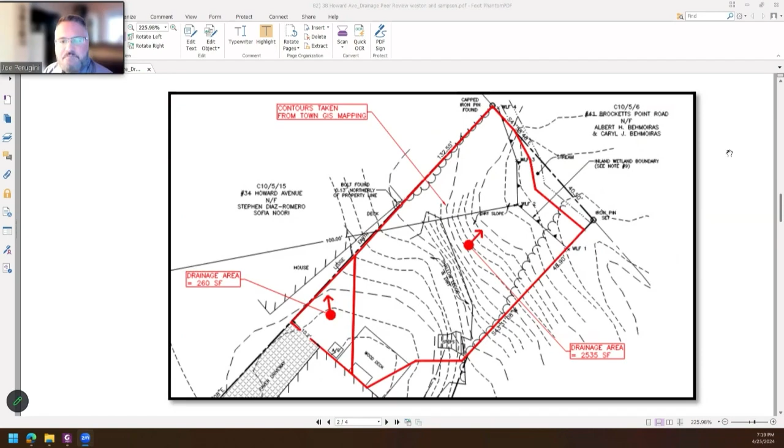Next figure, please. This is a zoom in of the current conditions after the patio was installed, with a survey done with spot elevations throughout. I added arrows to show the general direction based on the high points and where water's flowing. Most of the runoff flows to the upper right or northeast, and then there is some portion of that patio that flows north, or straight up. Based on the spot elevations given, I was able to interpolate and add some spot elevations between the spots that were shot.

There's about a 2% grade along the wall located along that property line. From being out there, there is an extension of the wall above the patio with a wall cap, which I was referring to as a wall curb. It prevents water from just flowing over the wall and into the property as it did under pre-development conditions. So this runoff, the portion of the arrows directed upwards, runs along the wall and then turns in a northeasterly direction.

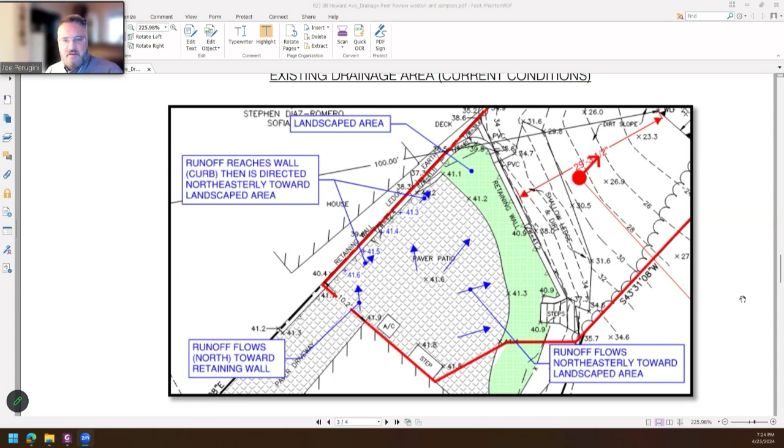So you have this thickness of topsoil. Below that, you have filter fabric, and then crushed stone in the portion behind the wall, and some processed stone, which is a stable base beyond the crushed stone. So you have this area of stone, crushed stone being the one with the highest voids.

That was important because the question is, where does the water go? If it's running off the pavers, it goes into the topsoil, which is in the planting bed. Considering what happens to the runoff, some saturates the topsoil, some can pass down through the filter fabric and into the crushed stone. There's a volume of storage that could happen in there.

That's important because it creates some detention. We look at how the peak flow of runoff is being reduced. So getting back to the original comment about increases in peak flow, to me that storage is going to be offsetting the increases. These are very small increases, but that storage of runoff, where is it going?

I don't believe it's running past the topsoil and over the wall. It would have to be an incredible amount of runoff to do so, but you also have the topsoil saturating. If there are plantings, that creates an uptake into vegetation, similar to a rain garden. You may have evaporation, but anything that overwhelms the topsoil saturation will probably just percolate down through the stone.

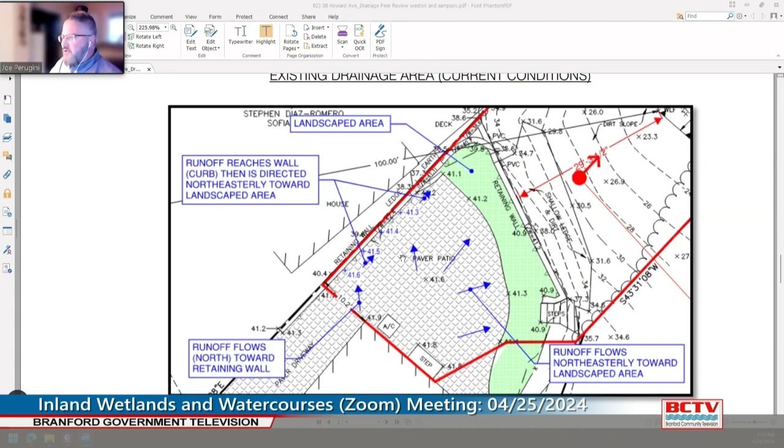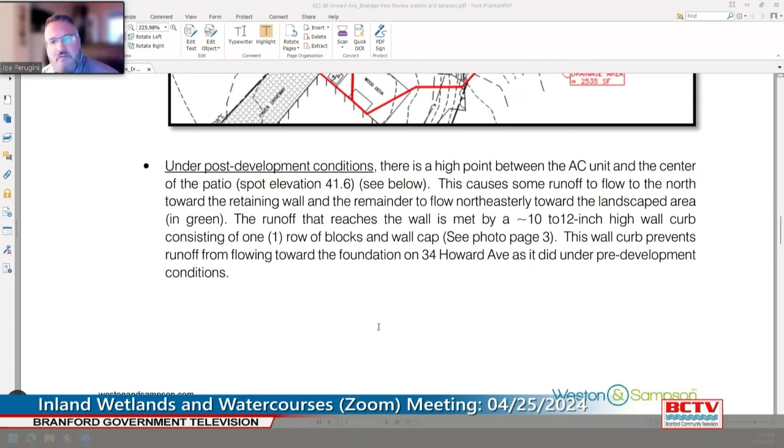If I can share, there's nothing to verify the actual width of the process aggregate or the sand or anything like that. No measurements were actually taken, physical measurements? Oh, I took measurements, yeah, they were included in my report. But I'm saying you don't have any photos of those measurements actually on site? A photo would help, since we weren't there to observe what you saw. Pictures tell a thousand words.

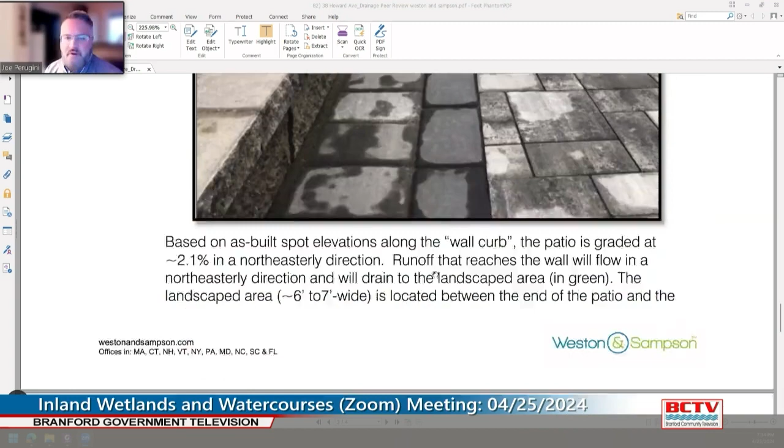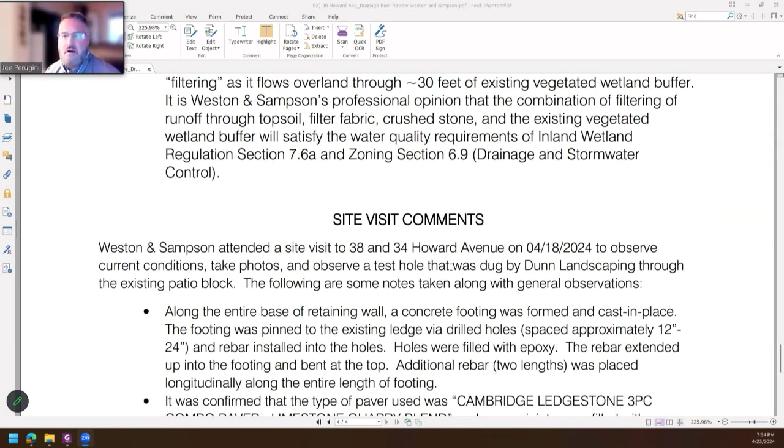Well, my report includes my measurements. There is a separate measurement that was done by the geotechnical engineer. You can compare those with mine. He took his information separately from mine, and I believe that was submitted for the record. But I don't have a measurement with a photo next to a tape measure, to your question. All right, thank you very much.

Mr. Chairman, with respect, this is Marjorie Shansky. With respect to the rain condition, Mr. Preddy has previously reported to the commission his observations during wet conditions, and Mr. Preddy is here if that's something the chair would like to revisit with him.

I would also like to echo that the letter from the geotechnical engineer has been provided to the commission. The geotechnical engineer has experience with soil and rock mechanics, foundation engineering, earthwork, and site work. He includes his measurements from the site observation and his conclusions, consistent with what Mr. Preddy and Mr. Perugini have said: there is no technical merit in a claim that the perimeter wall and patio account for any increase in flow or damage to the adjacent property, which is not a direct wetland issue.

The drainage issue associated with the wetland is: where is the water going? Mr. Preddy has answered that previously, and it's described in his drainage report. We brought in Mr. Perugini to evaluate and review those conclusions and arrive at his own conclusion, which is consistent with Mr. Preddy's. If you have additional questions for him, this is as good a time as any.

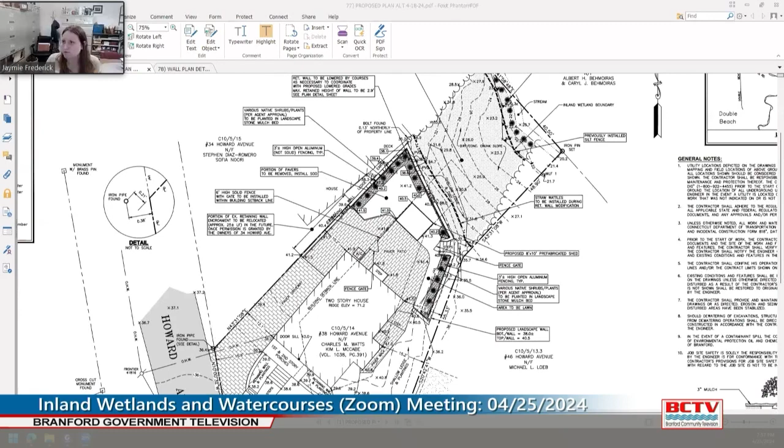Jaymie Frederick, the wetland agent - is everyone seeing a site plan? Yes. Okay, so here's the revised site plan. They did update the call-out portion of the existing retaining wall encroachment, to be relocated approximately 25 plus or minus linear feet in the future once permission is granted by the owners of 34 Howard Ave. The retaining wall is to be lowered by courses as necessary to coordinate with the proposed lower grades. Max retaining wall height is to be 2.5 feet.

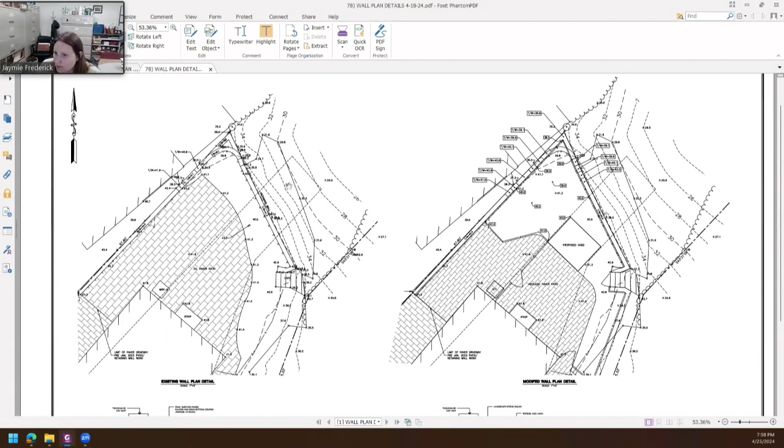And if you guys want more details, then I would suggest that you ask that of the applicant. We've got the existing conditions of the retaining wall and the proposed conditions of the retaining wall, and you can see the different courses and top of wall heights, with spot elevations near the base of the wall.

This is Commissioner Boda. It seems like if there was a revision submitted on Friday, perhaps Mr. Preddy could quickly review those changes that were made.

I can. Jim Preddy, Criscuolo Engineering. So one of the questions was, how was the wall going to be lowered? Well, we provided an outline of the sequence, and then I actually took the time to look at the elevations of the different courses, and figured out how to step the block to coordinate with the wall - the grades that we need behind the wall to meet the zoning requirements.

And that's what you see - that's what this enlarged plan shows. The one to the left was what exists now, and this is how we're proposing to lower that. It shows the steps of how it will be lowered, because that was a question that was raised before.

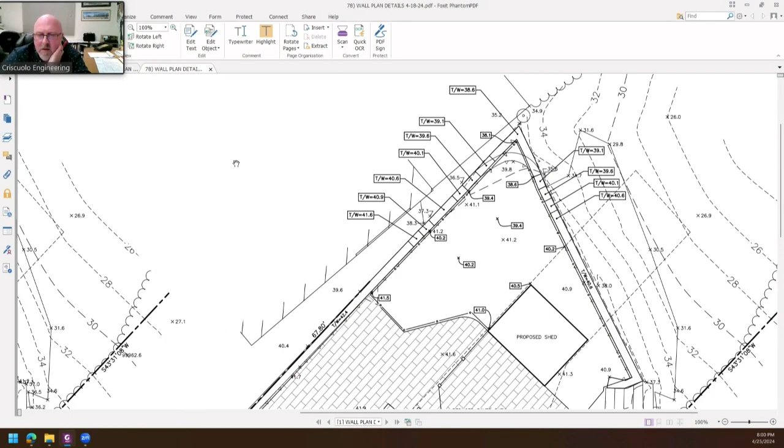If you scroll down, I also revised the detail that we had shown before, which was a generic detail from the block manufacturer showing typical installation. I modified the detail to more closely mimic the construction as I understand it from Roy Dunn, showing the concrete backup, the stone behind the wall, the geogrid reinforcement, and showing this being pinned and leveled to the ledge.

We also added a strip of landscape stone mulch behind the cap of the wall to ensure that even in frozen conditions of the lawn, the water would have a way to get into the stone section behind the wall.

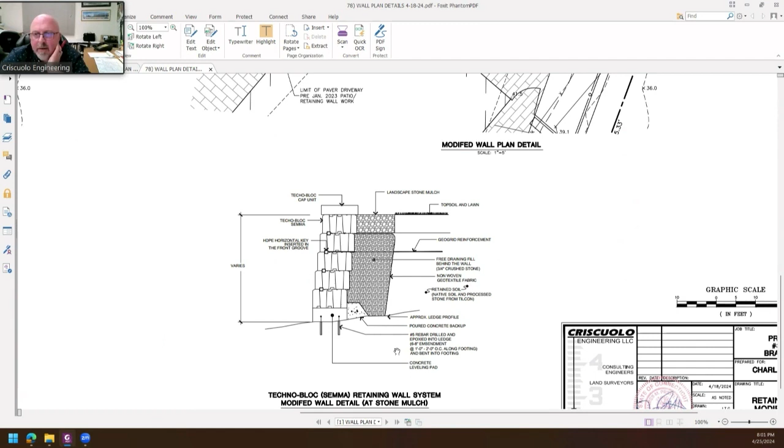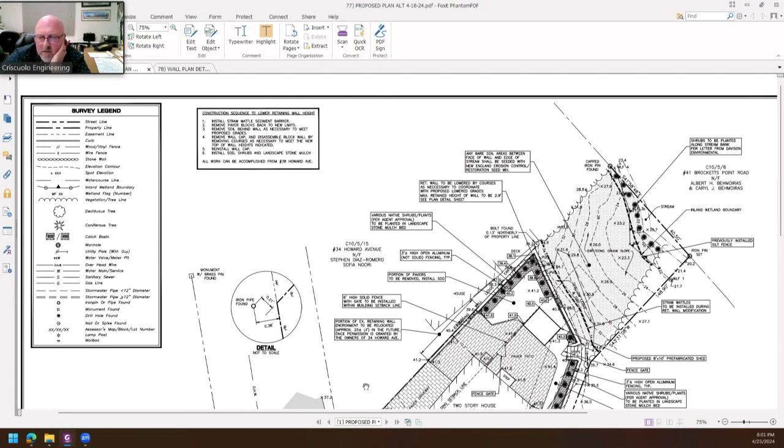As far as other adds, the other thing is if you could go back to the other plan, Jaymie. If you notice on the driveway side, I changed the pattern type so you can clearly see where the driveway ended prior to all this happening, and where the new paver started. There seemed to be some confusion on whether this whole thing was built recently or not, and that paver driveway existed, even before January of last year when the patio was built, up into the line where the retaining wall starts. So I changed the pattern there to clarify.

I think that was all as far as plan changes.

This is Commissioner Begman. A question about where the cars stop, there's no retaining wall that's level basically with the ground? Well, it slopes toward the road, but yes. This is where they stop now, is where that line is.

Commissioner Begman, just a question. I know this isn't zoning, but what would prevent a car from driving too far onto the patio? Well, we are installing a fence at the end of the pavers. The limit of paving is actually pulled back from what's there now, so we pulled back the paving considerably and added a fence along that edge of the pavement, so they could only go a few feet past the house after this gets revised.

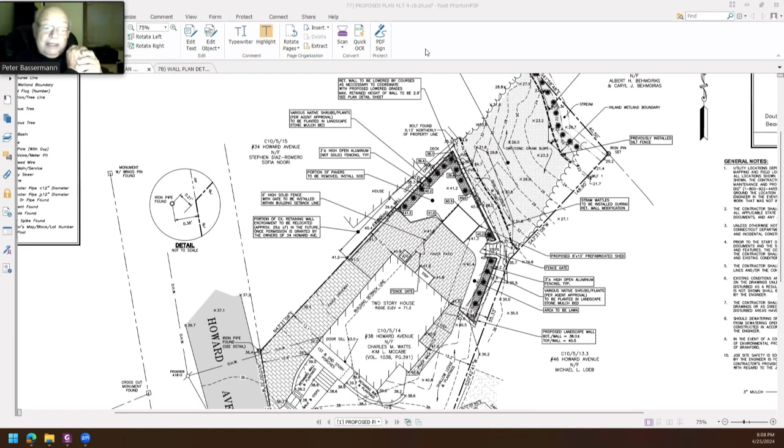This is Commissioner Bassermann. I think that with the presentation of the new material, addressing the questions raised at the last meeting with the public hearing, it would appear that those questions have been addressed. Commissioners have had a chance to review that material, and not hearing any further questions for Mr. Preddy, I would assume at this point that the record on this amendment is complete.

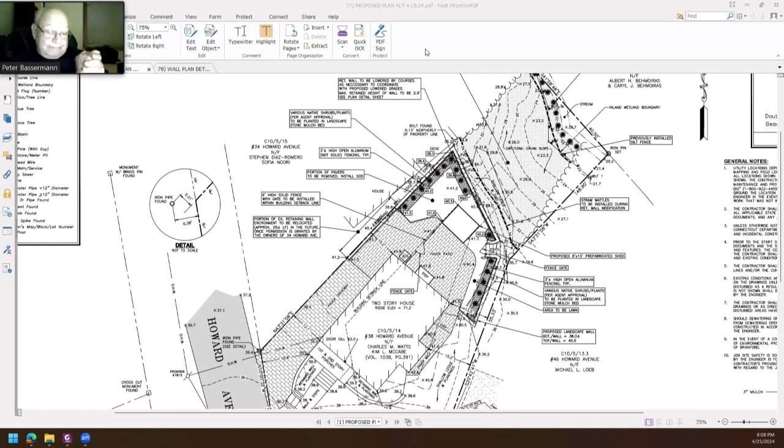This is Commissioner Bassermann. Attorney Shansky, does that conclude the presentation this evening, and are we ready to move on? We're ready to move on, subject to later rebuttal, but thank you. Okay, we now open it up to the registered interveners for their presentation this evening.

Thank you, Commissioner Bassermann. Keith Ainsworth, representing the interveners. So I have with me this evening Mr. Ascatino, who you saw before. He is a structural engineer. Mr. Rob Sonicson, who is a professional engineer, and Rob Russo, who is a soil scientist, as well as Sofia Noori, who is representing my clients as the intervener.

I'd like to start off by just making a few comments of my own, and I'll try to be as brief as possible. I do respect what you're trying to do in expediting the matter.

So I noticed that the new plans are yet another set of plans, and that the comments about the drainage done by the peer reviewer were showing a pre-existing drainage pattern based on the current pattern of pavers, and then make some assumptions about drainage going into the subsurface. But when you remove more pavers, you're going to have more infiltration, just as Mr. Preddy just said, more opportunity for water absorption, which means more water getting down beneath and going toward fissures in the rock, which is a transmission pathway to my client's basement.

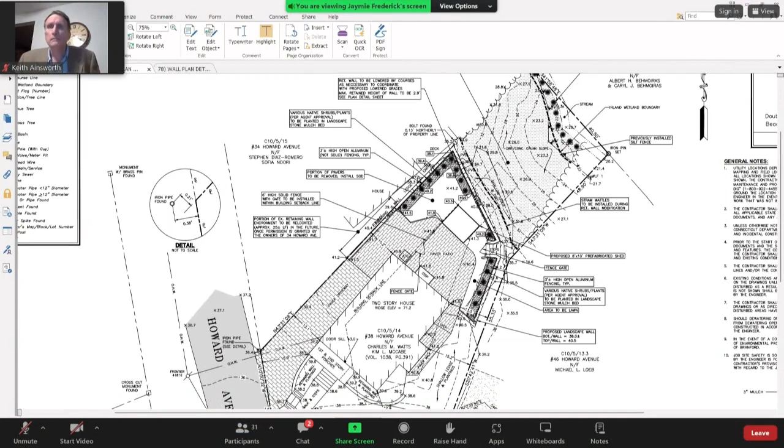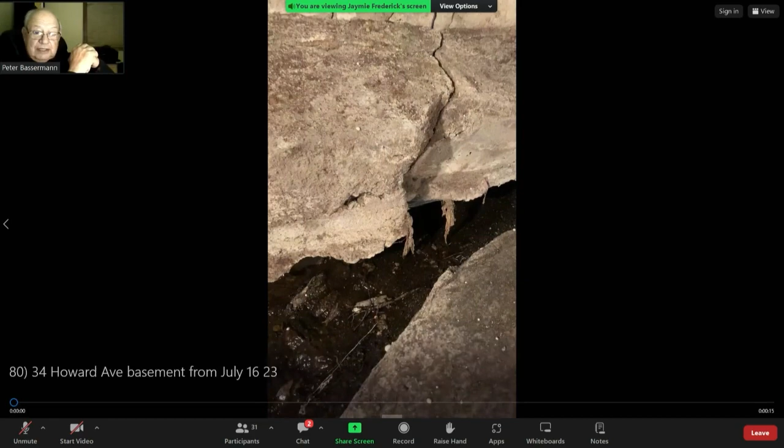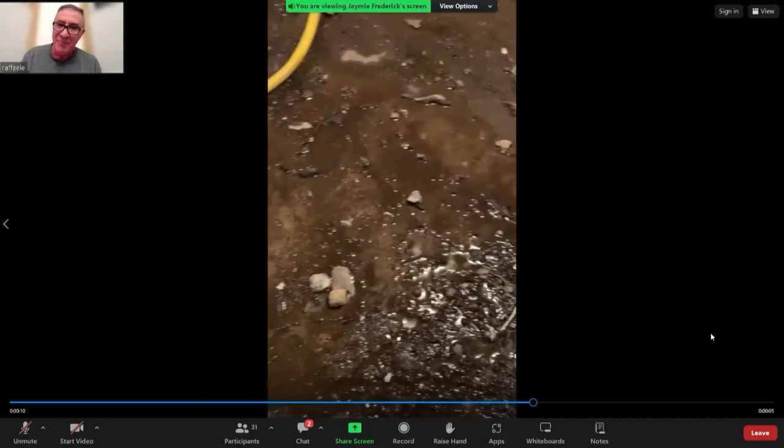Is everyone seeing the video, or what looks like a video clip? I see a picture, I don't see a video designation. Now you're seeing it? There we go. Now, that should be your weep holes. Your weep holes are into the basement of 34.

Commissioner Bassermann asked, on a site map, can you indicate where the location of that video took place? Yeah, I could give you an approximate location if we look at a map. Jaymie, can you help me here? I'm looking for the survey of 34 Howard. Mr. Chairman, who took the video? Perhaps they are the best person to talk about what they were looking at. I saw the location in the basement, so I have an approximate location. I'm pretty confident I know where that is.

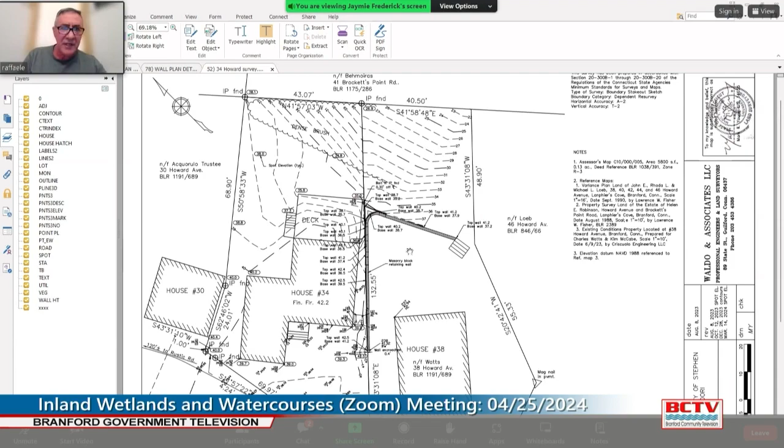Can we point that out on the map I'm viewing now? Okay, I think we want to scroll that up. That's the original condition. Let's see, I would say roughly where it says masonry block retaining wall, where that arrow is pointing to, next to the 55, roughly approximately that location, or slightly closer to the corner, give or take 4 or 5 feet at approximately that area.

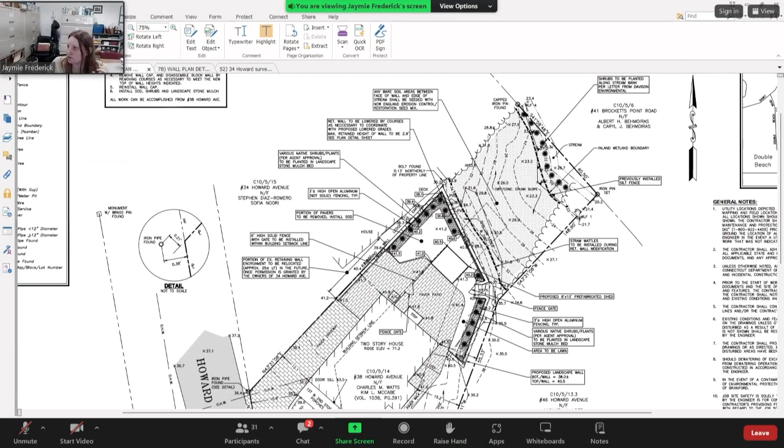Okay, anything else, sir? Unless you have any other questions, if I have any questions, otherwise I'm done. Any other questions from the commission? Okay, Attorney Ainsworth, who's next? Thank you, sir. Mr. Sonnichsen, you're up.

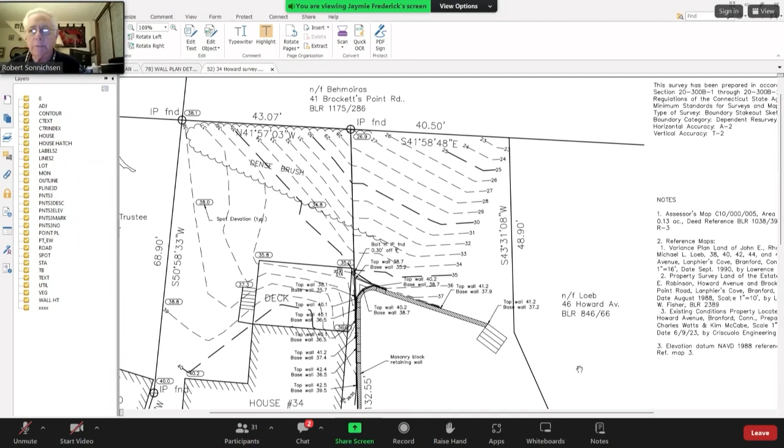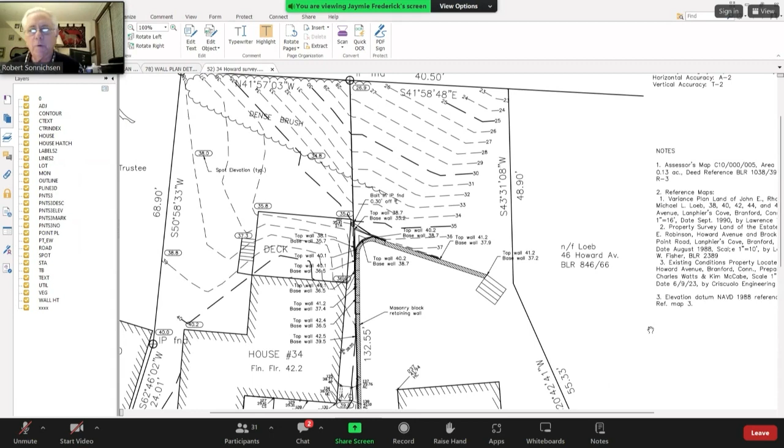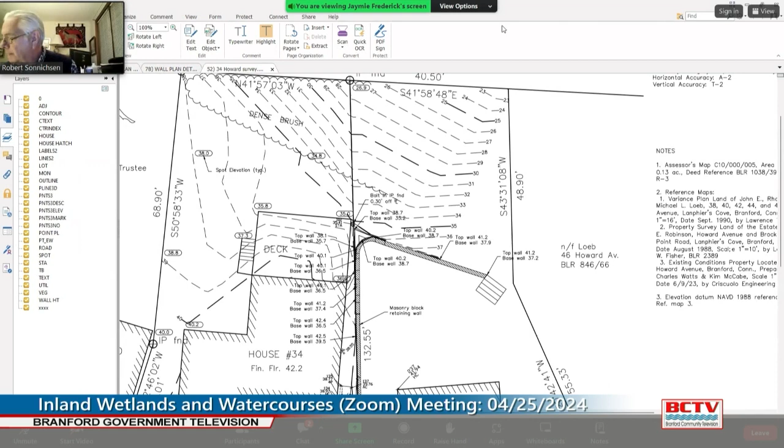I'm going to talk about the changes made in the 4/18/24 plans. The drawings have been changing since September 25th, 2023, and the proposed application has morphed and changed over all of these hearings. For example, the drawings from 9/25/23 to 2/14/24 indicated clearly, and this is critically important as far as I'm concerned, that there would be a 4-inch PVC pipe with gravity flow to an outlet in the rear, immediately behind the wall.

The 4/18 plans have now changed and show no controlled drainage behind the wall. It's all just stone. The reason you put the PVC pipe in is because the water drains directly down from the stone and seeks the perforated PVC pipe, and you direct it to where you want it to go. In this case, without a PVC pipe, the water goes down, hits the bedrock, and flows through crevices as it may and makes its way out.

One of the things that is critically important is that storm drainage be controlled in this kind of installation. Without that drainage pipe behind the wall, and the way they talk about drainage pipe at the bottom of the wall, those pipes do not run parallel. They don't pick up the water from the entire length of the wall, only a small amount that may drain to the far corner. That's not consistent with the standard drainage design for these kinds of block walls.

Excuse me, Commissioner Papantonis: Mr. Sonnichsen, could you say that again? I'm trying to understand what you're saying. Okay.

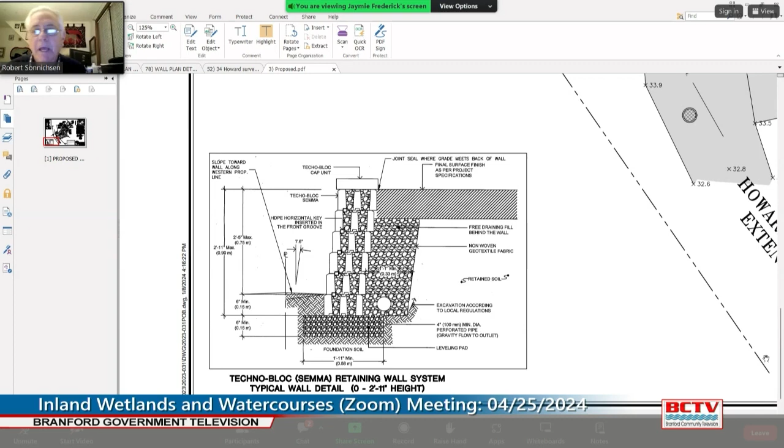If you go back to any of the drawings previously before the commission, they're cross-section drawings of the proposed conditions after the wall had been modified. All of those drawings show a 4-inch PVC drainage pipe behind the wall. Here's an example, you can see it clearly on this detail. Every single drawing that has come before you until tonight shows that 4-inch diameter perforated pipe with gravity flow to outlet. That has been removed from the proposed drawings.

From a technical perspective, there are serious problems under the existing conditions. There's flooding in the basement next door. Now you're not going to put in a drainage pipe, which would in fact collect any water that leaks from behind the wall and discharge it to the far end of the wall, and you're allowing it to drain into the rock and across into the basement.

Attorney Ainger mentioned that all the previous plans showed multiple geogrid layers. The current cross-section in the 4/18/24 plan shows only one geogrid layer. I think that might have been an oversight, because there are in fact two that were constructed, but that's something I just wanted to point out.

There's another interesting thing on this drawing. If you look at the top, at the back of the capstone, there's a note that says joint seal where grade meets back of wall. That's an extremely important component in a wall like this, because when water flows across pavement and hits a joint with another material, the water seeks to go down the face of that material. These details anticipated that. It obviously wasn't included in the original construction, because there's a lot of water leaking through the face of the existing wall. This note would have addressed that to some degree, but it's been removed from the current cross-section plan.

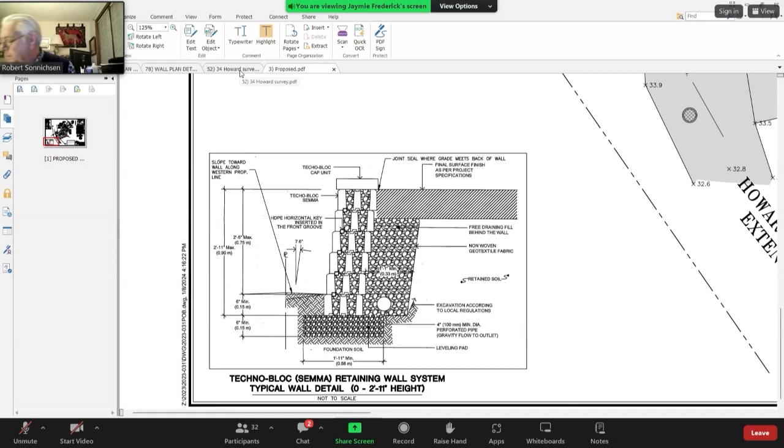I know there's a note on the plan that says the wall is going to be 2.9 feet, no higher. But my measurements show that on the plan before you, the top of the wall to the bottom of the wall differentials range from 2.6 feet, which is good, that's less than 3 feet, to 3.6 feet, which is 0.6 of a foot higher than the 3 feet. So they would have to go back and get a zoning permit from the zoning commission, and the section of the wall that's over 3 feet would have to be offset from the property line, along the setback line, by the height of the proposed wall.

Just a minor note, but I looked at the plans. There was a call-out way over on the far eastern side of the prior plans that said '3-foot aluminum fence, typical.' What caught my attention was that the new plans that just came in actually call it out right on the top of the wall, right adjacent to Howard Avenue. It had never been shown with that specificity as going along the entire length. It just says it's typical, and doesn't really show if it stops someplace and continues. You have to assume it's going to be along the entire top of the wall.

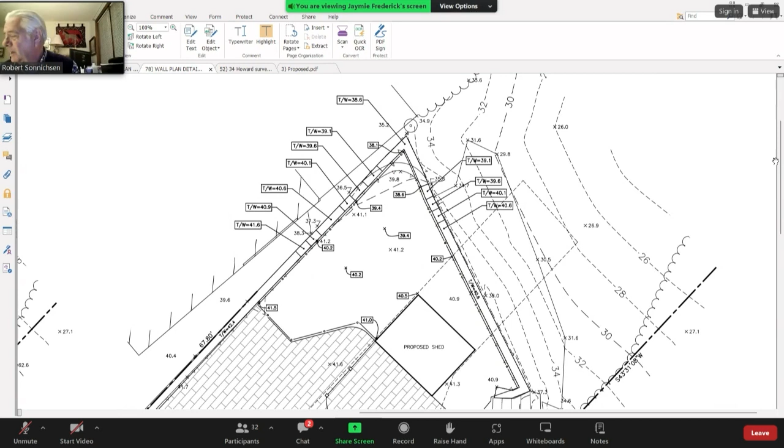Those were my comments on the revised plans. We really didn't have a lot of time, but I'm glad I had a chance to review them. There were a lot of changes that happened very abruptly in a very short period of time. It wasn't just small changes. Particularly the drainage one was very alarming to me. So thank you for your attention, and I can answer any questions you may have, or I'll turn it back over.

Commissioner Bassman: I'll turn it over to the commission for questions for Mr. Sonnichsen.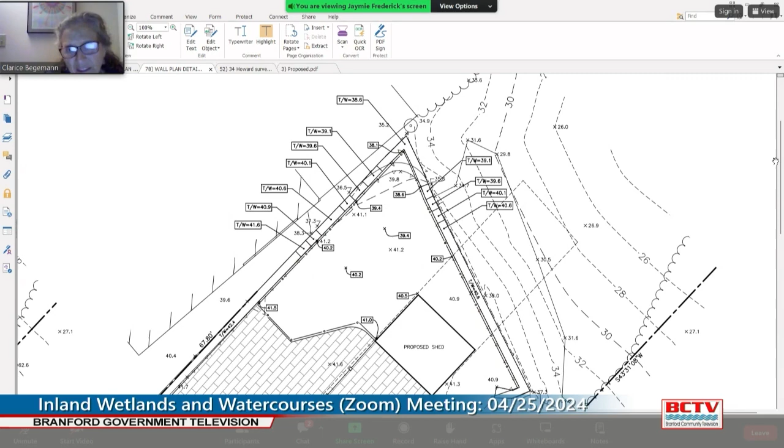Commissioner Begemann: Can somebody point out where Mr. Sonnichsen sees the 3.6 foot versus the 2.6? There's a 40.1 on the top of the wall. Right, here or over here? Actually, I think the 3.6 might be 40.1 to 36.5. Wait a minute. Yeah, 41 to 36.5, the bottom of the wall. This is right adjacent to the deck behind 34 Howard Avenue. So we have a top of wall, and the spot where it transitions, my measurement there showed it was 3.6 feet.

Commissioner Bassermann: When you say your measurement, are you comparing plans, or was there an actual empirical measurement? No, I measured the difference between what's shown as the top of the wall and the spot grade at the bottom of the wall, and subtracted it, and it came out 3.6. But I'm saying, were you actually on site when you did that, or did you do it by the plans? No, I used this plan. This is the only plan that shows what the new top of walls are going to be. It just came out on Friday. Okay, thank you.

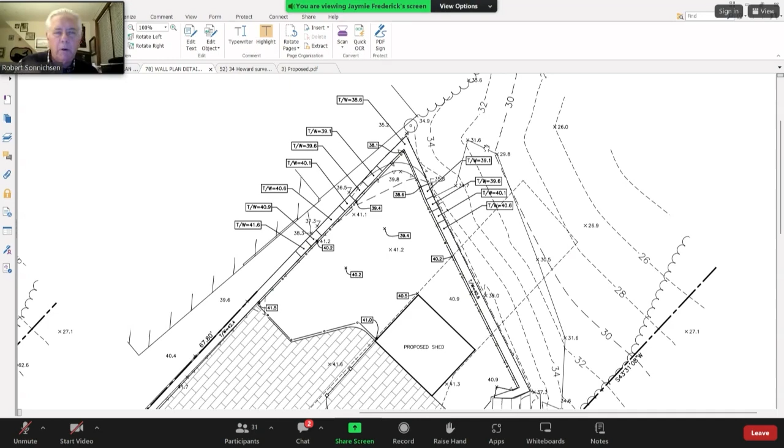This section only has... well, the mulch has changed. This is a side note, I'm digressing here for a second, but I am a little bit concerned about it. It used to show mulch there on top, but now it shows landscape stone mulch, but there's supposed to be plants planted in it.

I don't really know how the plants are going to flourish if they're planted in stone. That's kind of up for a landscaper to figure out. But what's going to happen is that's highly permeable material. Any water that flows along the wall or sheet flows down across the patio will run into this landscape stone mulch buffer and drain directly down through the mulch into the crushed stone, and it will continue going directly down.

Until it hits the ledge profile. You can see the approximate ledge profile at the bottom. From that point, it's going to find its way by gravity to wherever it wants to go. What's happening now, based on our observation, is that some of that water is making its way through voids in the rock and off toward Howard Avenue, and that's caused an increase in leakage in their basement.

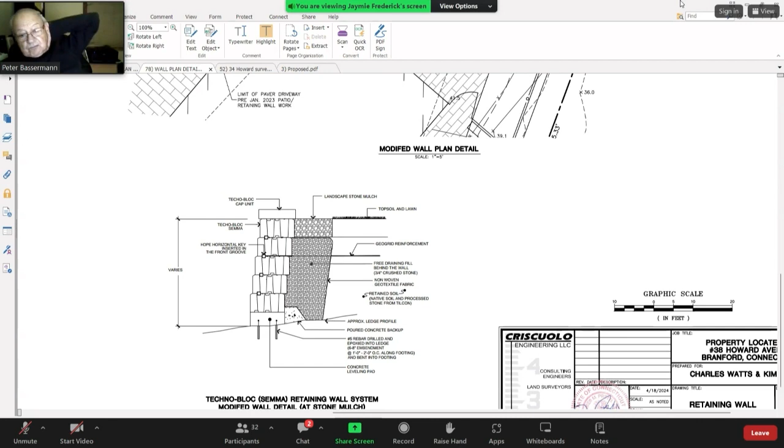Do we have one more presenter this evening, Jaymie Frederick and the agent? Before we move on, I do think it was a good point raised about the stone mulch and the growing medium for the proposed shrubs, and have the applicant speak to that.

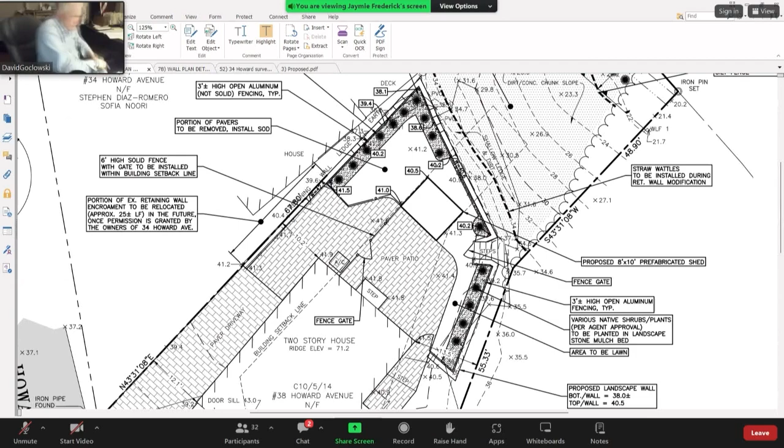There is a proposed straw wattle to be installed down slope of the construction. In this case, you see those straw wattles going over an area that's called shallow ledge and dirt. Straw wattles need to be staked into the ground, and I would say alternative means of erosion and sedimentation control should be specified there, because I doubt that stakes can be driven into that ledge that are going to hold straw wattles in place and keep them functional.

I would also note that only very recently did the results of the test pit that was done in the patio become available. I really haven't had time to review those with regard to the construction of the patio as it exists now and the modifications that are proposed, to see if it's consistent with the hydrology they're describing, and if there's further potential for impact based on what the results of that test pit are. It's just information that arrived at the last minute that I haven't really had a chance to assess.

Just recently, with the new information, I believe the applicant's team has clarified that the pavers are almost all impervious. Earlier in presentations, the applicant's engineer said no, they're somewhat pervious, but the reviewing consultants have said no, they're really impervious.

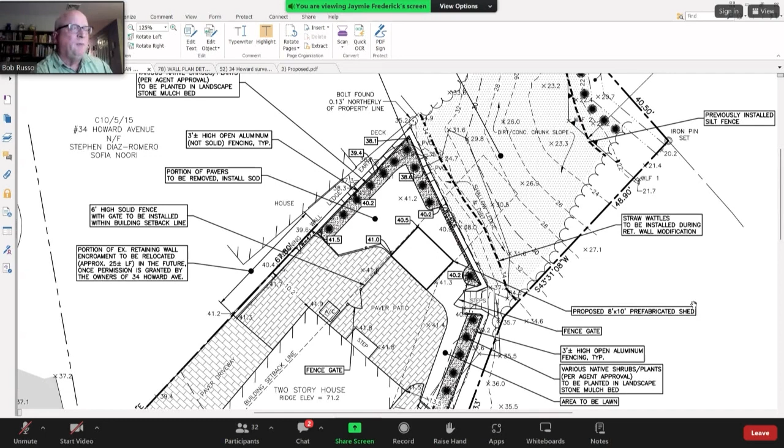I hope that that's now clarified, and would like to get a chance, although I know the public hearing will need to be closed, to relook at this based on an understanding of how they've described the pavers themselves that are being used.

I'll wrap up quickly. I feel like this is very much at the same place it was at the last meeting, and that is they went ahead and built this. There wasn't an application before the commission. The commission didn't have a chance to walk the site or to hire experts if they so desired. Now the commission and the consultants for the neighbors are operating with a dearth of information on this project. I'd be happy to answer any questions. Thank you.

Commissioner Bassermann, this is the opportunity to address Mr. Russo with any questions you have. If not, I'm going to ask Attorney Ainsworth whether that concludes the presentation from the interveners this evening.

Keith Ainsworth here for the interveners. I would just like to give Sofia Noori an opportunity to address the commission briefly.

This is Commissioner Begemann. Before we do that, can I ask Mr. Russo a question? In terms of not being able to see the test pits, or to have time to have thought about the materials that are now thought to be behind the walls, can you tell us how it would affect the wetlands depending on what was there?

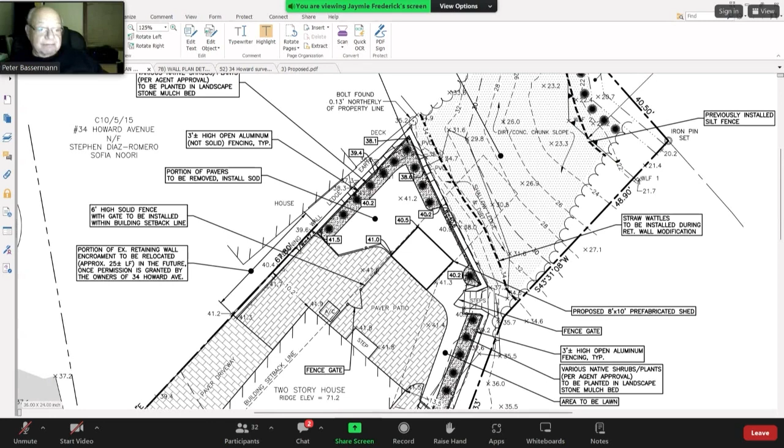The commission notes they would also include that as an exhibit if it's going to be shared this evening. After a brief pause to set up screen sharing, Sofia confirms people can see the shared screen.

Yes, so this is the size of the test pit - it was 2 pavers by 2 pavers. I'm not even sure if it was 2 feet by 2 feet given the size of it. No one was able to see what was in it or what occurred out of it. We've gotten descriptions, but I think it's a little funny that Jaymie wasn't invited to look at it, and there are no other pictures of what it actually looked like inside.

It's also really confusing what's occurring with the drainage, because some people are saying it's impervious, some are saying it's pervious. Then some said there's polymerized sand so nothing can get through it, but then they're saying it retains water. Their structural engineer and our structural engineer both shared that there's no mortar between the blocks - it's an interlocking block retaining wall that's supposed to just drain freely. So it's super confusing to me how exactly this is draining.

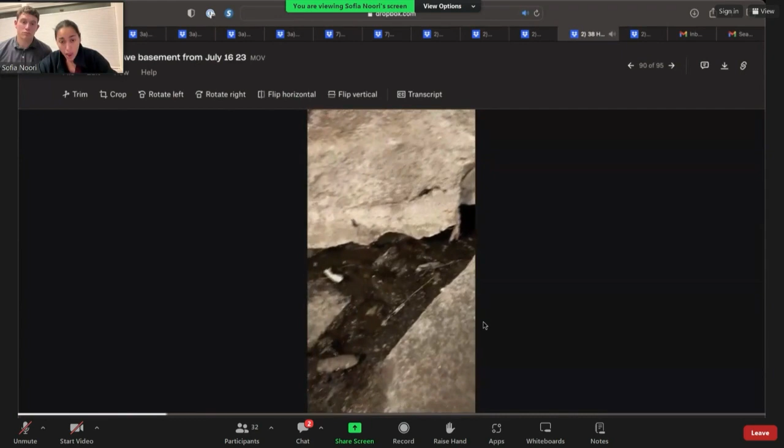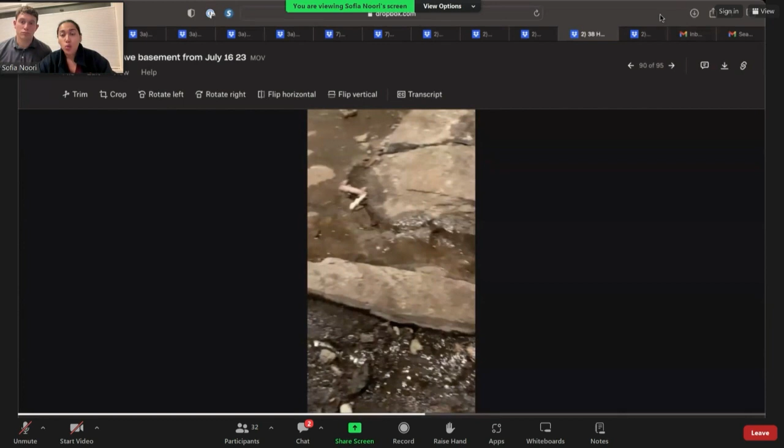What's also concerning to me - and maybe I'm starting to understand a little bit - is that parts of the wall don't seem to weep, and then this is literally happening in our basement. They're saying the water flows down towards the wetland, showing a red arrow indicating the water just goes down towards the wetland, but I'm not sure if that's correct, because there is weeping in the wall.

We do see it, and it's coming onto our property. I'm not sure why, but it does actually drain onto our property. To show you this, it's weeping between the blocks onto our property, and then this water presumably also goes to the wetlands - I'm not sure.

So I just don't understand how it drains. And I'm not sure if we'll ever understand it, because none of us have seen what the inside of the wall looks like. We've been through 11 months of this and people still can't agree on if it's pervious or impervious.

Another piece is, when we were asked as interveners to submit any other questions, we submitted as many as we could to get answers. Attorney Shansky and Jim Preddy provided responses. One question was that in Dunn's photo roll, it's clear there are extra pictures of how it was constructed. They said there's no further pictures, but you can clearly tell there's more. They're just not being provided to us.

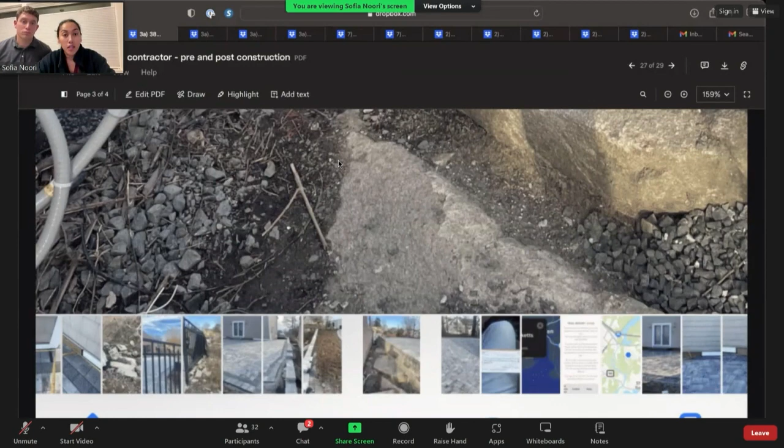So it just makes me feel like we don't have all of the data that they have, and they're providing selective amounts of data that support their thesis.

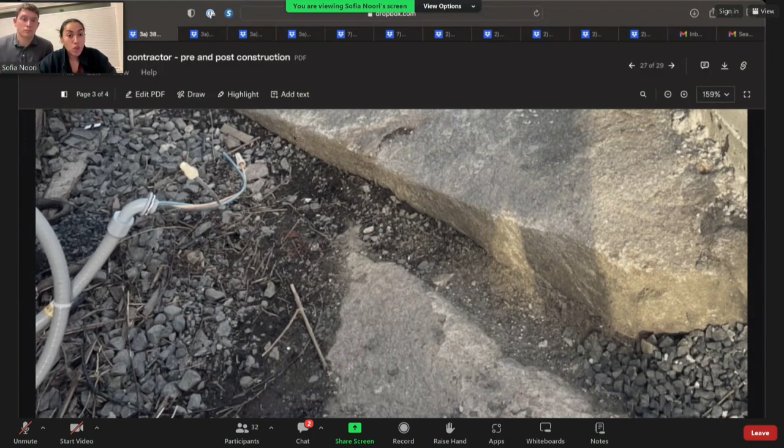Also, I'm still confused about how much geogrid this retaining wall is supposed to have. I understand the geogrid is supposed to provide some structural integrity to the wall, but they said there was 2 layers, while in their cross section of the wall that Mr. Preddy completed, there's only 1. So in the proposed plan, I guess I'm confused about how much geogrid is supposed to be in it. Is it providing some structural integrity?

Because they did just say that they are planning to drive cars on it. So is there supposed to be 1, 2, or 3 layers? I feel like I have no idea about that, and I feel like it's kind of important to know.

And then the other piece is going back to the heights of the wall. Let me see if I can find their detail of the actual updated wall. Let's see. Okay, it's item 78, I'm just bringing it up. I can screen share it. I've got it open. Jaymie, I found it.

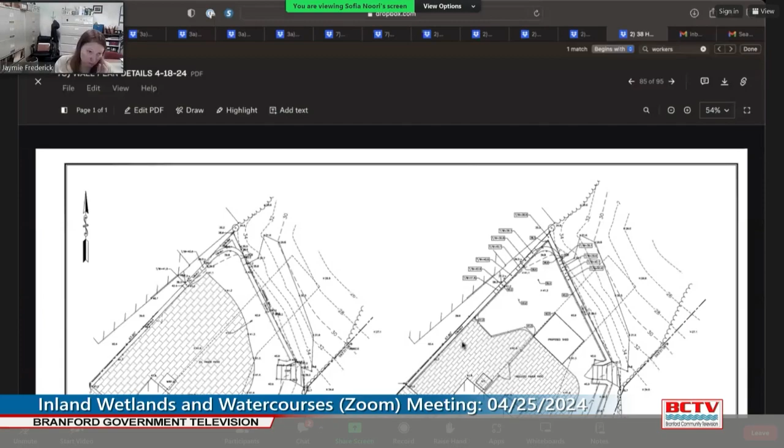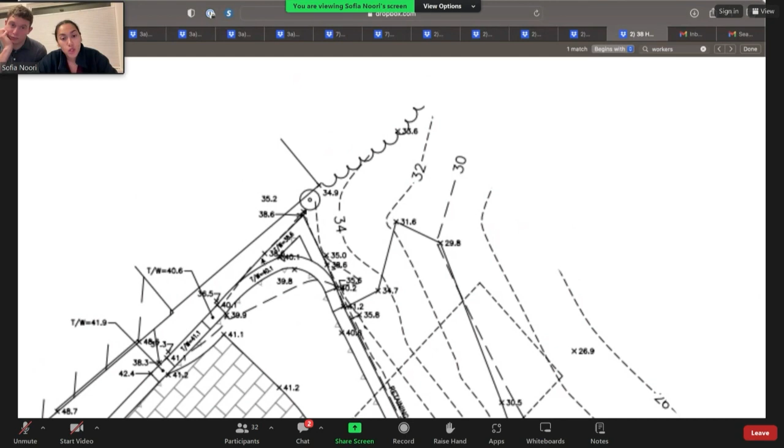So in this, they're saying the wall is going to be reduced to 2.9 feet, right? It's clear that there are certain points on our side of the wall that actually really aren't lowered, which is what Rob was saying. But also here, this top of wall is 40.1, and then the elevation here is 35.2. So it seems like, I don't understand if these are supposed to be two different walls, but functionally, if it's a 5-foot wall, we know Dunn is constructing a 5 to 6 foot wall.

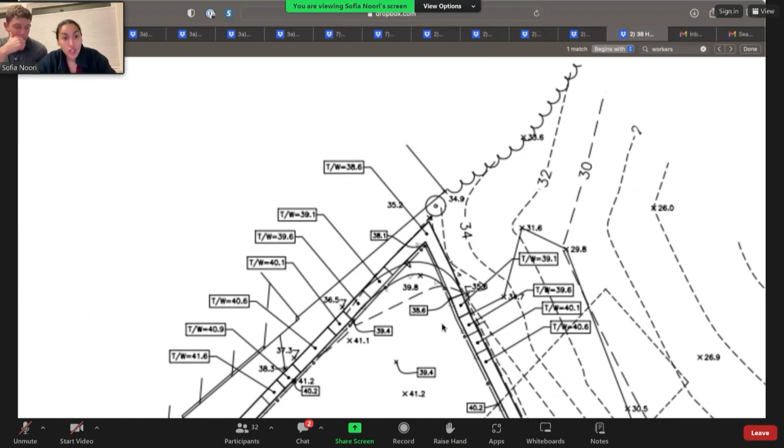At 22 Howard Avenue, who have applied for permits, which is good and decent, they have 3 layers of geogrid. So just because there's this little curvature, does that mean that if it's 5 feet tall collectively, it doesn't need more geogrid than that? That's a question I have, and it's inconsistent because, again, Jim Preddy said there were 2 layers that he saw, but the detail in here shows just 1.

The other piece I'm really confused by is the driving on it, because initially they didn't necessarily share that they were going to drive on it. Now they're saying it goes up to here. But what happens if someone just keeps on driving? Do they just fall into the wetlands? What is supposed to keep them from driving over the soil here into the wetland, or onto our side?

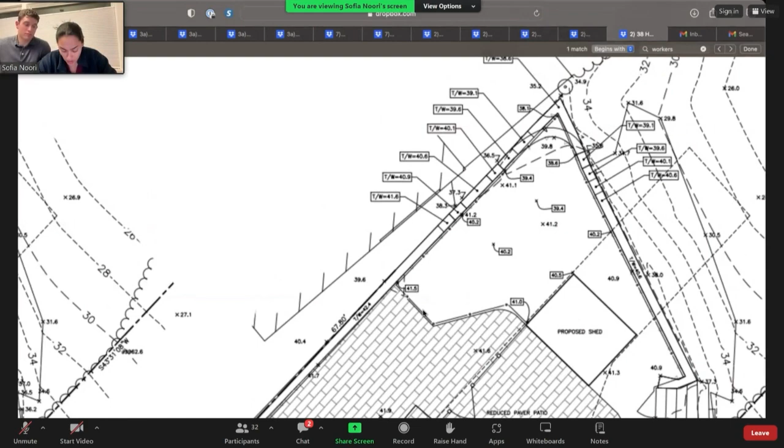And then again, I'm just not sure, like, that the water, I'm not convinced we understand enough about the drainage to be able to say that the water straight up isn't going into our basement.

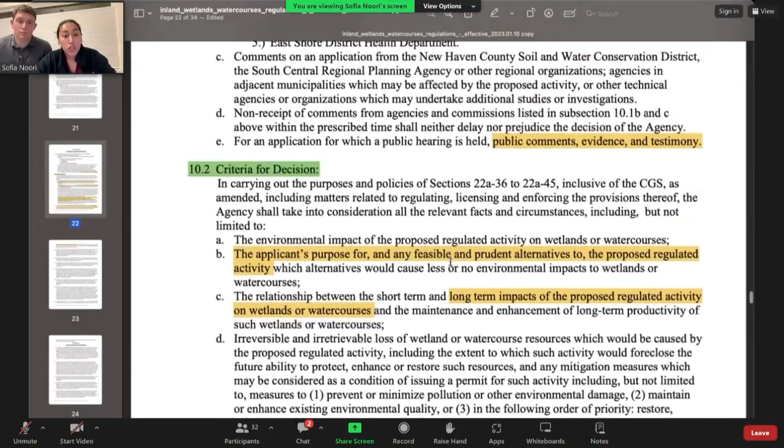And looking at the regulations, if we go back to this, just really trying to stick to what we're supposed to be thinking about for the criteria for a decision. We're supposed to think about the purpose for and any feasible and prudent alternatives to the proposed regulated activity. But Commissioner Glowkowski asked like 5 times to the applicants, why did they build this?

And nobody's told us what it's for or what the purpose was. So how do we know if any feasible and prudent alternatives actually existed? They decided what they wanted to do and then did it. And for all we know, they could have just needed a bigger deck. We don't know if this needed to be built for it. And so now what they're saying is that there's no alternatives because they already built it, and the best thing that we can do is just let them keep it.

The other piece too is, I understand that they said there's no impacts currently that have been observed to the wetlands. I'm still not convinced that they actually proved there's no long-term impacts if we don't understand how the drainage works and where it's going. So that part, I'm not totally sure about either. And then looking back at these things, potential impacts to properties do matter, like the character and degree of injury to the reasonable use of property which is caused or threatened.

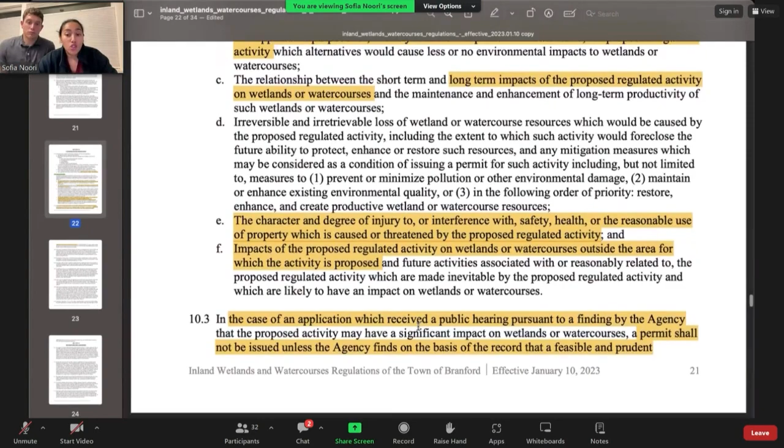So the threat of it is also a factor for consideration, and unfortunately we're the owners of the threatened property. And then again, when it comes to the impacts of the proposed regulated activity on wetlands or watercourses, we're also in an upland review area. And I'm just not sure if they've actually met this, which makes it really hard for us to support the application.

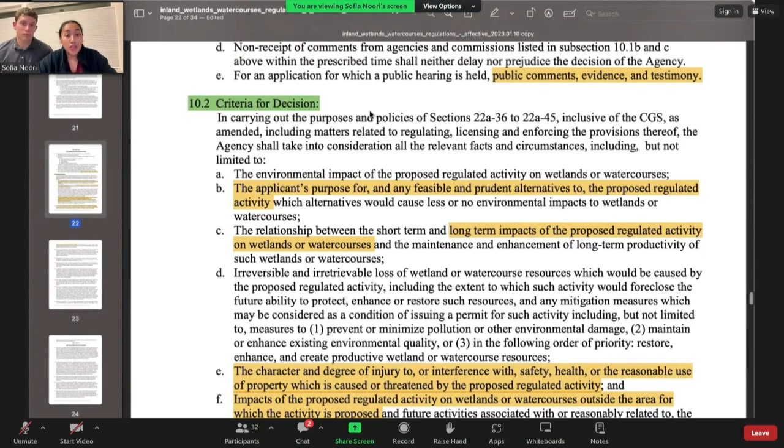The other piece as well is, just stepping back from the actual factors for decision making, I think the tough part is the ethics piece, right? I was reading about why the Wetlands Commission and wetlands regulations were even founded, in the preamble to the regulations. A lot of it talks about protecting citizens, and that this is something we should do, protecting the wetlands. It's about the ethics of it, trying to do something honorable for the environment.

And I'm just worried that this also sets a precedent that if you have means in this town and wealth, you can do what you'd like and then throw money at the problem after, hire 3 lawyers and get a permit. And I'm not sure that's the precedent we want to set, that you can just keep pushing at it, do 11 months of meetings, and eventually somebody will give you something.

I also just think that this is ill-gotten in some ways. And I understand they're trying to make things right, but honestly it comes off as performing responsibility instead of taking responsibility when there are so many inconsistencies to what they're saying. So it makes it really tough for us to actually support what's happening here. And I don't know if another meeting is going to give us more information. Every meeting there's so many questions, and I'm not sure we're getting any closer.

So we give our consent to the removal of the wall, and for them to just restore it and build it correctly so that we know it's actually in.

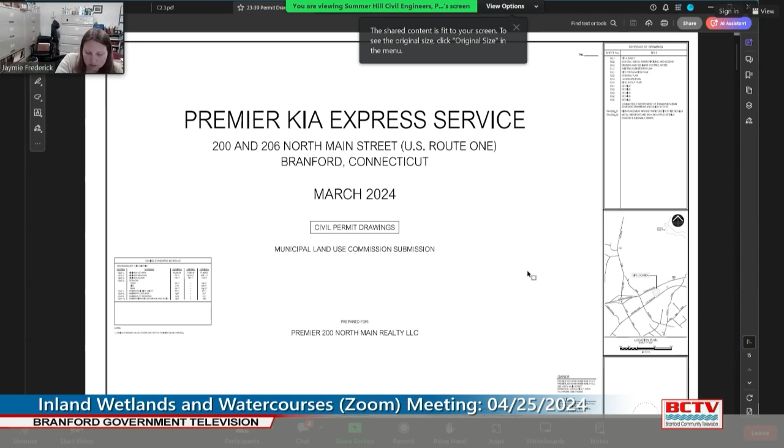Okay, can the commission see my screen now? Yes. So this is two parcels of land, 200 and 206 North Main Street on the north side, directly across from the Premier Kia site. There are cars from the dealership parked on this site now. I'm sure you're all familiar with it, just trying to get you oriented.

So this is North Main Street on the bottom of the sheet, left and right. North is kind of diagonal up and to the right, and Interstate 95 is behind this parcel. The northerly boundary of these two parcels are the common boundaries with the southerly highway line of 95. There was a building on the left-hand parcel, the west parcel, at one point in time. I don't know when it was demolished.

The site improvements that remain on the site today include some bituminous concrete pavement, and there's some processed stone areas also on the site. There is a drainage easement that cuts across the site here, if you can see my cursor, in favor of the Connecticut Department of Transportation.

The inland wetland that Matt Davison delineated and is here to talk about tonight, and is also described in his report that we submitted, is along the northerly boundary. If you can see my cursor - actually, if I zoom in a little better, maybe it'll be easier for you. Hopefully that's better. It is an inland wetland associated with a highway drainage ditch that runs parallel to the south side of the highway. Matt can describe that a little bit better, if you'd like, a little later.

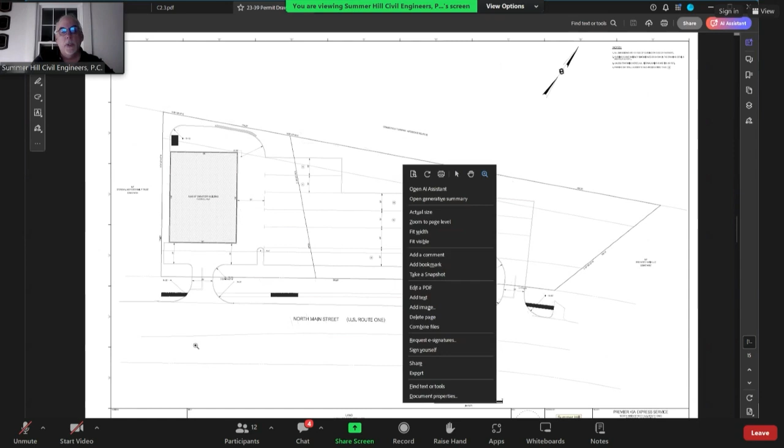In addition to the building, the other major site improvement would be to pave the area that is currently partially paved or processed stone. The plan, if I go to a simpler layout plan, is to park cars in a more formal manner, arranged properly in this large paved area, which is now either partially paved or partially processed stone. If I go back, this is our site preparation plan, and you can see this hatched area is the existing bituminous pavement that will come out.

There are also some light poles, existing area lighting on the site, that will come down and will be reused. There's a sidewalk across the front of the parcel that'll get reconfigured a bit. In the end it will remain, of course, but it gets reconfigured by the closure of this curb cut and the creation of this curb cut.

There are some - the parcel has a bit of a history. Jaymie has explained it to me. Jaymie, Matt Davison and I met out at the site several weeks ago. There are waste concrete blocks - you can see them labeled here, and they run

basically at the top of the slope along the rear parcel boundary. They end here at this end of the site, and then they continue down this way, kind of southerly towards North Main Street also.

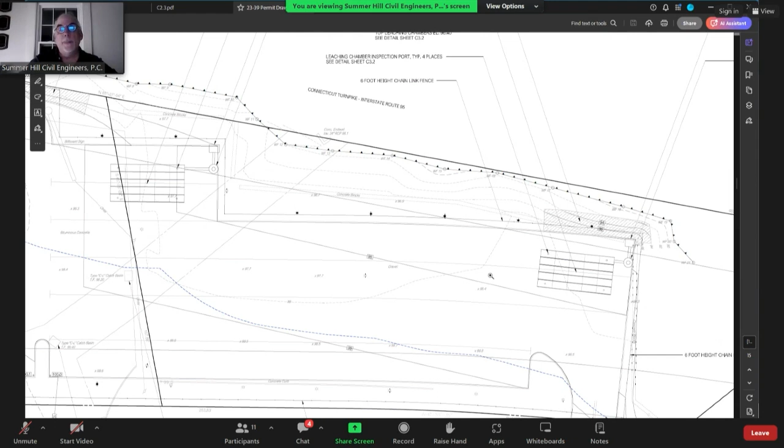Given the requirements of the owner and the use of the site, there isn't room to do a surface system. On other sites, in other instances, with the right conditions, we at times would do a surface stormwater management basin, and many times do propose a constructed stormwater wetland.

There isn't room on this site to do this, and actually, more importantly, this site, we learned by doing some test pits, excavating some test pits, is a filled site. It is actually, if I zoom in a little bit, you'll be able to see.

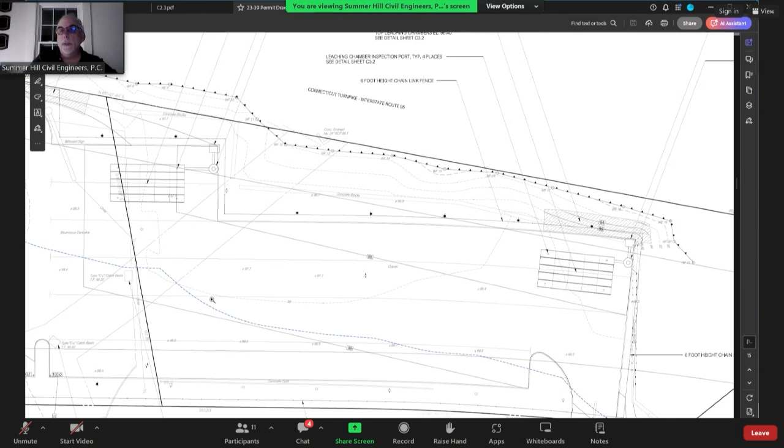By the way, has the commission walked this site? Is anyone familiar with it? I know where it is, Commissioner Bassman. I know where it is, but we haven't, as a commission, walked the site.

Okay, so if you get it, I don't know if you do. If I'm not familiar with your commission, but if you do formal site walks or if you go individually, you'll see that. In fact, this probably will help. For instance, you see a spot elevation here of 96.9, so roughly 97, the wetland is down below elevation 90. So this is, and you see these ground surface elevation contours that are close together.

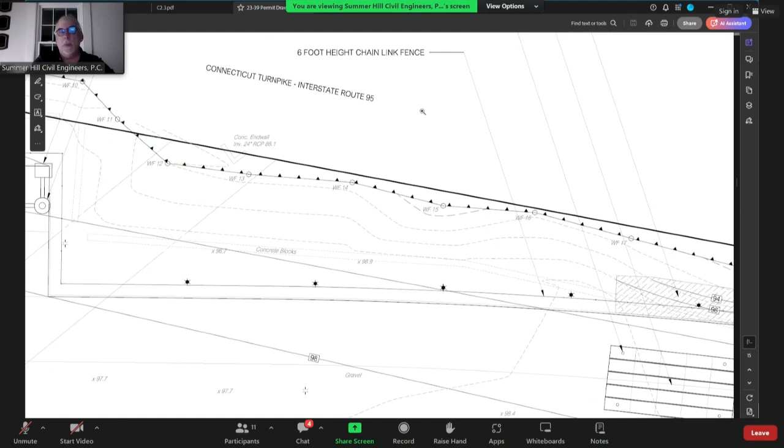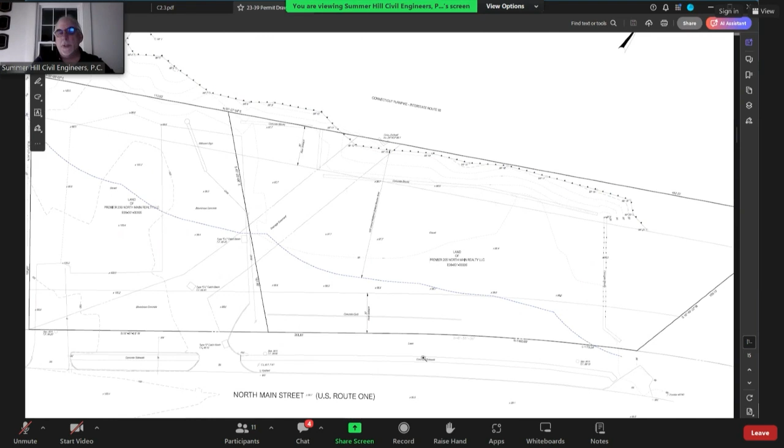And then when you back out onto the site, you'll see, I'll zoom back in a little bit here. I'm trying to, actually, let me go to the existing conditions plan. It'll be a lot easier to see. So the site is essentially at the street elevation and very flat until you get to the rear, where it dramatically slopes down. And it looks like, when you look at the site, it looks like it was a filled site, historically filled. And sure enough, when we did test pits, there's a good 8 feet plus of fill that has been placed on this site.

And it's miscellaneous fill, it's miscellaneous earth fill, a mixture of different soil types. It's also, in the test pits we encountered broken concrete pieces. There's some pre-stressed concrete pieces here on the site, and other miscellaneous concrete pieces on the site. The site is, when the commission walks it, I think you'll all agree, it's very obviously a filled site, and it's raised up at least 8 feet, actually more than the wetland elevation.

Yes, Commissioner Bassman, pardon my ignorance. What does the issue with it being filled have to do with then a surface stormwater treatment plan?

So for instance, to construct a stormwater wetland, we would normally, in order to support wetland plantings, and Matt Davison can jump in here if I go awry, but to support the wetland plants, to provide the proper functions of the stormwater wetland, we would be excavating down 8 to 9 feet. We would be creating an 8 to 9 foot hole on this site. And it would, that excavation and its size and its side slopes, when you're that deep, when you excavate down that deep, would back itself up into the site, the site proper, the usable portion of the site, and the owner simply wouldn't be able to use it.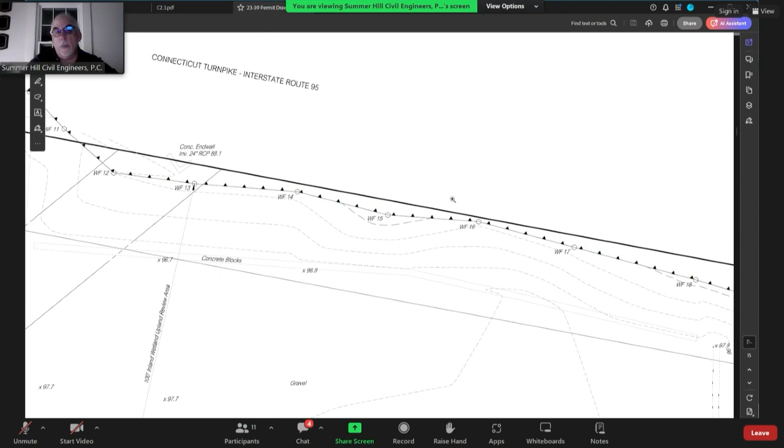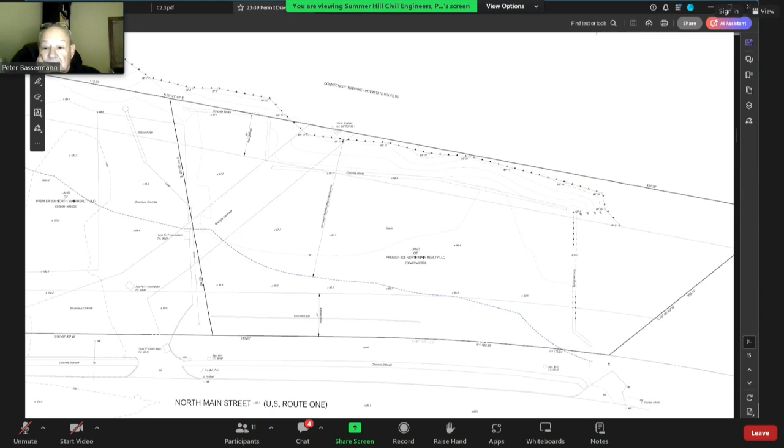I don't understand that. I guess when you say use it, is there something in the construction of the site that would not be engineered correctly, or does it, because of the size of it, limit the number of cars you can park? Exactly, yeah, the depth. So the depth of the site in this direction, if you can see my cursor...

If we built a surface stormwater management facility, whether it was a stormwater wetland or not, in really simple terms, it would take up so much area that the owner would not be able to use the site as he plans to. So we did the best we could to strike a balance between what the owner would like to do with the site.

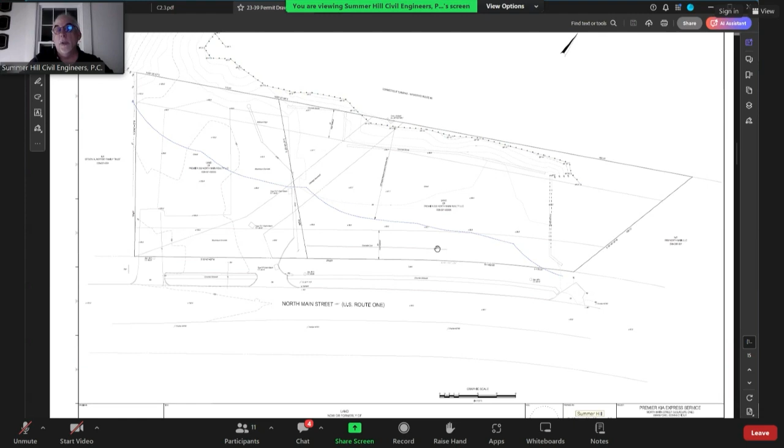And that's why we have subsurface infiltration systems, and that's why we have treatment before we introduce the water. Today, as you might imagine, surface water runoff runs off the site, directly down the slope and directly to the wetland.

When we're done—Commissioner Bassermann, if in fact the surface was pervious, would that reduce the size of the hole that you need to dig? No, and that's a very good question. I was about to get to this. Unfortunately, when we excavated the test pits, we learned that the miscellaneous fill and the depth of it...

...precludes—we can't count on a treatment function in that miscellaneous fill, because it's made up of miscellaneous earth material, different soil types, and concrete, waste concrete. That's the reason that we're treating it with stormwater treatment structures first.

We cannot—we actually said that in our narrative—we cannot count on the natural soils. There are no natural soils above the water table to be able to treat the stormwater. So if we had a pervious surface and we allowed that water to go straight down, it's not providing a treatment function because it's infiltrating through miscellaneous fill and concrete, broken concrete. Does that make sense?

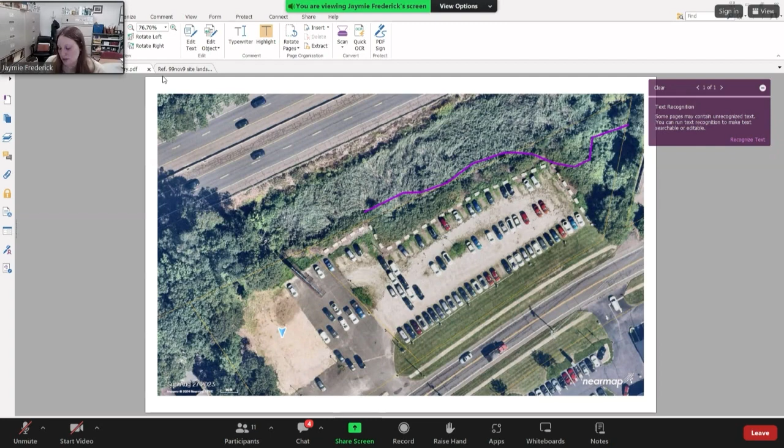I did take the wetland delineation from the current application, the site plan with the current wetland delineation, and overlaid it with the old wetland delineation site plan, and they pretty much align for the most part in the extent of where activity is proposed. So this plan was approved—well, this is the landscape plan, one of the plan sheets of the approved plan from 1999.

The proposed activity did extend a little bit further eastward on site. You can kind of see, if you look closely, there's a dashed line here—that's the mafia blocks that were in the wetland. They were to be taken out and moved to the top of the slope, and any fill material removed.

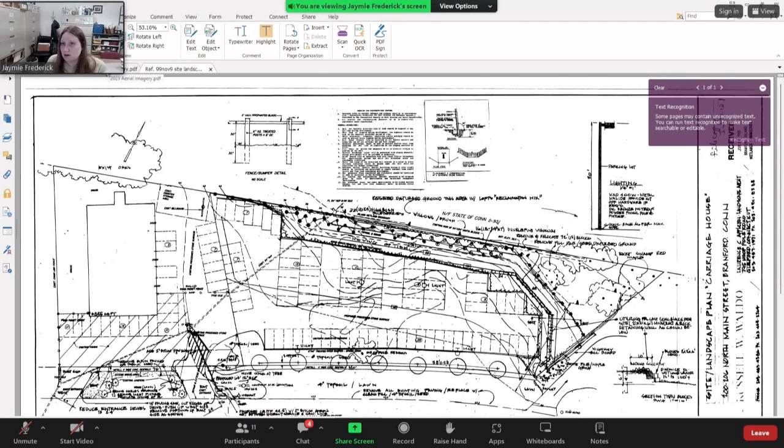And this slope vegetated. Looking at our records, it looks like some of the mafia blocks or concrete blocks were removed, to the extent I'm not really sure. But the wetland delineation, again, from this file and the current file is pretty similar, so it does not appear that any material that may be remaining has impacted the extent of the wetland. There are still some miscellaneous blocks in the wetland.

I don't know that it makes sense to try and take them out at this point. The applicant has mentioned a site walk. I don't know if that's something the commission feels would be helpful for this application, but also it sounds like Matt Davison has a presentation, so I don't know if you want to hear from him first.

I don't know if I'd call it a presentation. Comments, I don't know, ability to answer questions. No, I can speak to this. So for the record, Matt Davison, professional soil scientist, professional wetland scientist.

I flagged this site a while back, and then I didn't hear about it again until Mike called me, and then we did a site walk with Jaymie and Mike, and we discussed some of these same issues and concerns that you're discussing now.

The wetland itself is, I would call it, a linear wetland, almost like a swale, and it's primarily picking up runoff from the highway. If you look closely at the wetland, you can clearly see there's degradation as a result of inputs from the highway. It's essentially a Phragmites monoculture, a common reed monoculture at this point. And I think, Jaymie, we discussed, is there something we can do there with that being an invasive species?